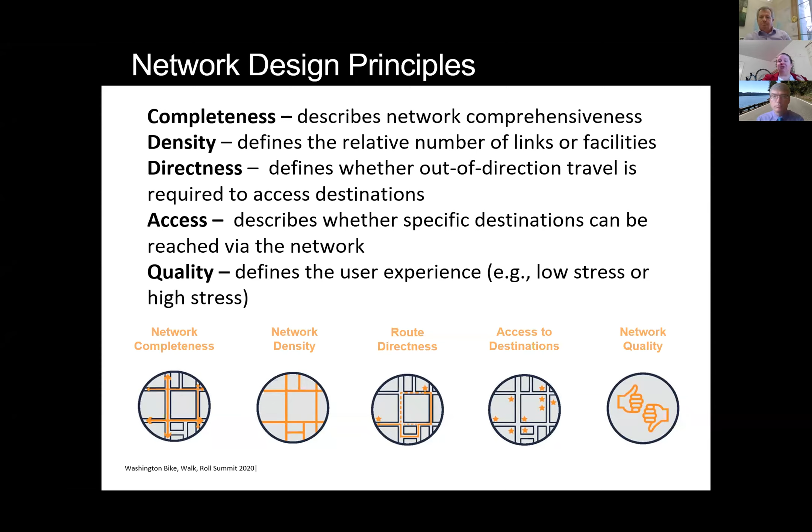So thinking about this, you can have one of these elements or even several of these elements in a network, but they aren't necessarily all represented. You can have a network that's dense but indirect, or a network that's high quality but doesn't get people to where they want to go. So this is important because counts don't tell the whole story.

Historically, the ATP has relied on counts and assessments of demand to drive bicycle facility selection and where facilities will be constructed. One example of where counts didn't tell the whole story was the 520 bridge. And Brian, I'll ask you to elaborate here if you want when you talk. There was the 520 bridge. There were not counts available because the facility didn't exist. It was constructed anyway, and today it's one of WSDOT's highest use facilities.

So what that indicates is that you can't always rely on counts to understand where the demand is. Therefore, if we start looking at networks and where facilities need to be built to get people where they want to go, that will give us a more nuanced understanding and a better chance of building a comprehensive, connected bicycle and pedestrian network. So identifying these network deficiencies is really an important part of demonstrating need, is the take-home message that we're conveying here.

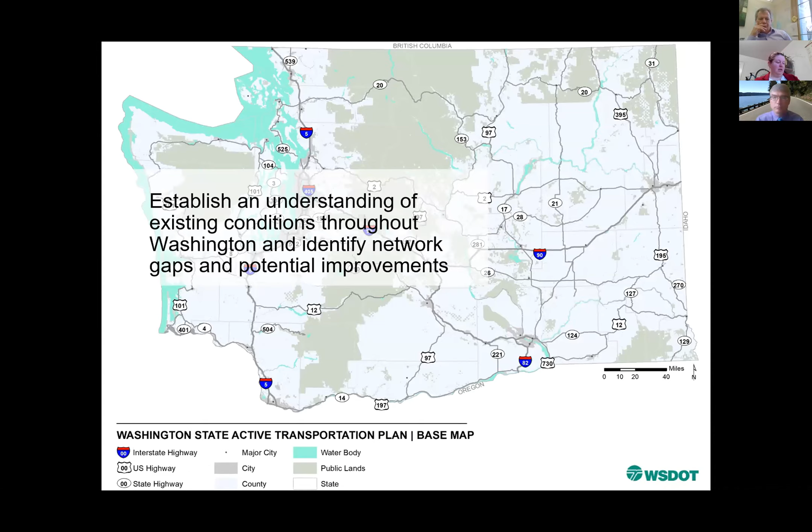And the Washington State ATP, one of the things that it strives to do is establish an understanding of existing conditions throughout Washington along the state highway network in identifying gaps and potential improvements. So WSDOT considers this in two ways. They want to consider travel along the state highway network and then the ability to cross the state highway network. We did that through a consideration of links, which is along, and the tool that was used to assess travel along roadways is level of traffic stress.

Level of traffic stress is a scale of network facility quality that is numbered 1 through 4, with LTS 1 being the lowest, LTS 4 being the highest, and that corresponds to lowest stress facilities and highest stress facilities. The methods are grounded in a guide that was released by the Mineta Transportation Institute in 2012. There are various flavors and adaptations of LTS that are used. The adaptation for WSDOT included context, number of roadway lanes, presence of bike lanes, presence of shoulders, and traffic volumes.

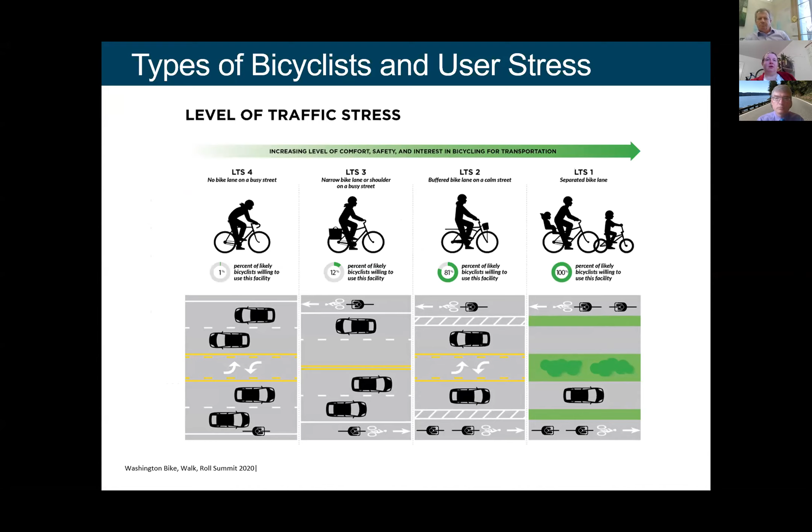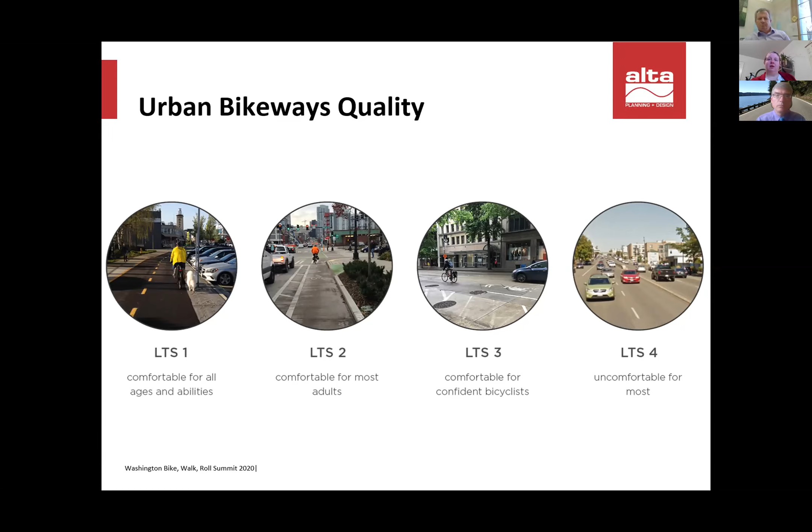This is a picture of what roadway sections might look like if you are considering LTS 1, LTS 2, LTS 3, and LTS 4 roadways. And these are tied to Roger Geller's four types of cyclists, if you are familiar with that scale. Here's a quick visual reference. This is what LTS 1 through 4 roadways might look like in an urban setting. And these photos are taken from Seattle. And here are photos of what those same LTS 1 through 4 facilities might look like in a more rural setting. And these are taken from various locations in Eastern Washington.

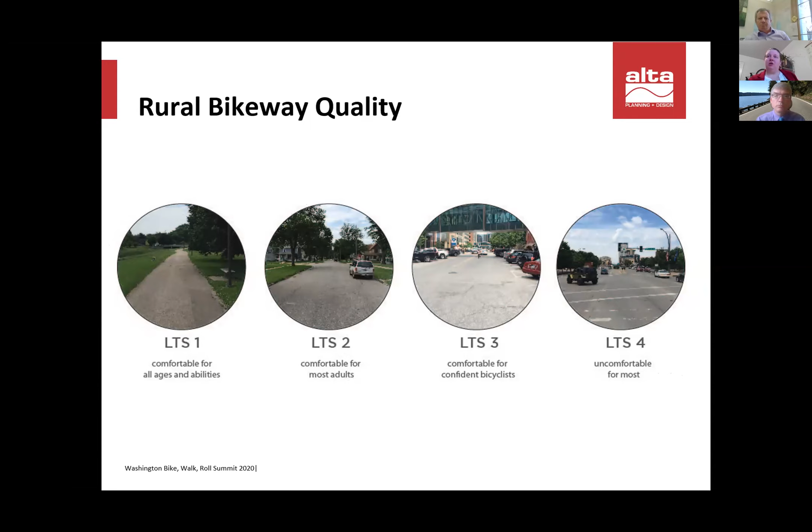You can imagine that doing a statewide analysis with level of traffic stress was data intensive, and we discovered data limitations as we were moving through the analysis. Specifically, we wished we had bike lane widths, more detailed information on trails, and more information on sidewalk presence. There are other attributes that would give us a more nuanced ability to understand the network. Those might be parking and right turn lanes, but those can also be done at a more detailed level when you're looking at a corridor.

So this is what we came up with, and this is just a draft map. This is not available yet. It's still in development by WSDOT. Barb mentioned the plan will be out for comment later this fall. We identified gaps as areas with a level of traffic stress score 3 and 4. This is, of course, a first pass at understanding the need on the state highway system. And as mentioned, Brian will talk about how this slide that you see here was refined.

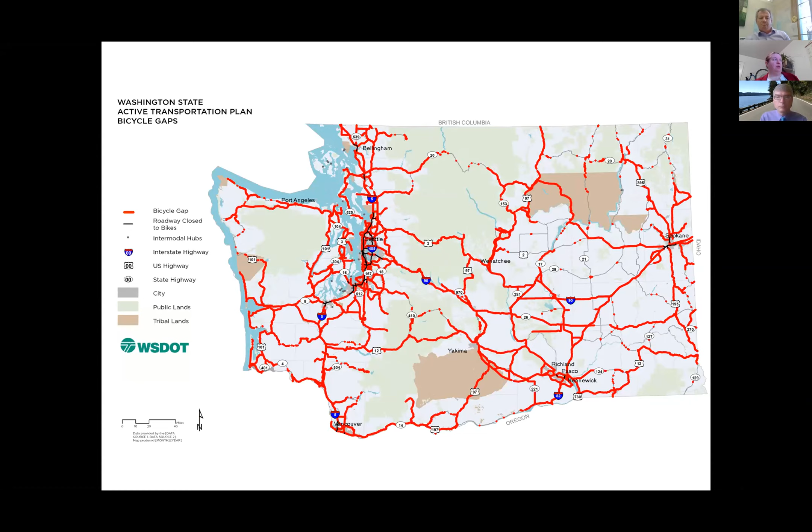We're going to touch on nodes really quickly, and that's across, how you get across the freeway. For this presentation, I'm referring to this concept as the highway barrier permeability test. It could also be referred to as the highway crossing stress test, or my favorite is the why does the chicken cross the road, or how hard is it for the cyclist to cross the road test. The purpose of this study, which contributed to the Active Transportation Plan, was to understand how hard or easy it is to cross roadways in the state highway system.

What we used, the tool that was selected, is a route directness index. The definition of a route directness index is it considers the variation in a straight line distance versus the network distance. So it measures out of direction travel. If you want to get from point A to point B and it's 1 mile in a straight line, and it is 4 miles via the roadway network, that means you have to go 4 times as long and 4 times out of direction to get to where you want to go, meaning it's very likely a trip that you are not going to make.

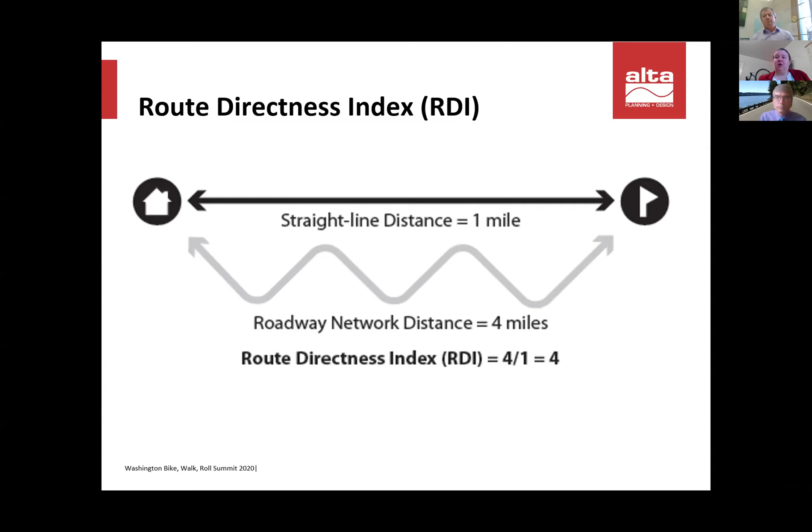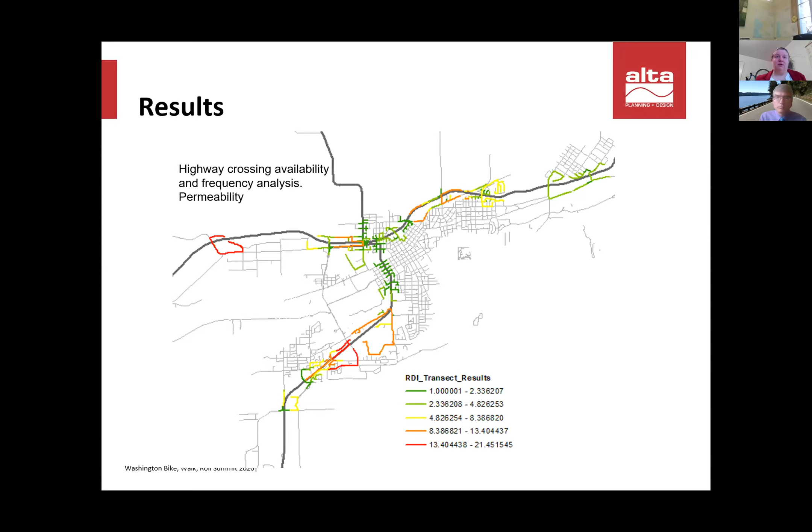Now, we did some preliminary visualization of this data, and we showed locations where there is a route directness index of greater or less than 2. For the sake of conversation and analysis in the Active Transportation Plan, we started to think about areas where route directness index is less than 2 as crossings that might viably be made. We know this isn't a perfect metric, but it is a place to start.

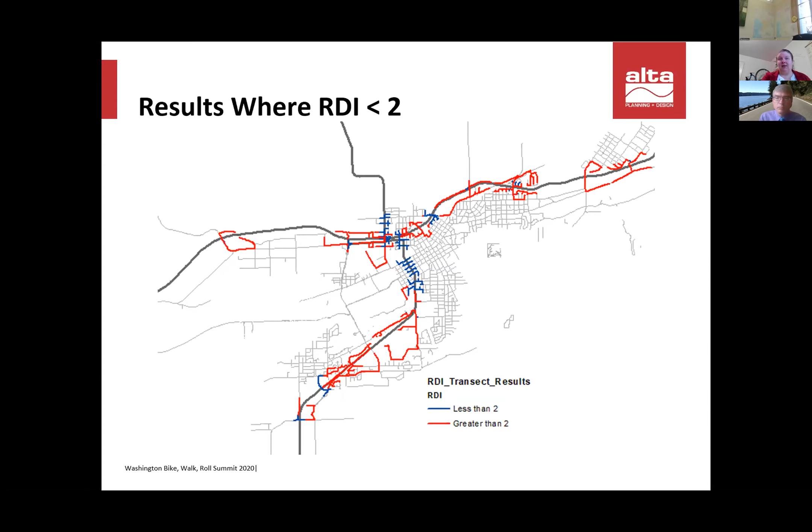And as a note, WSDOT has not adopted this study or an official policy behind the route directness index yet. Brian can speak to that, but it is definitely an exploratory study, which is working its way through the draft process. A couple of potential metrics have been explored as a part of the study: average route directness of a roadway or a corridor or a county, average distance between crossing opportunities that might viably be made, and that is where route directness index is less than 2, or an average RDI, which is mixed with level of traffic stress.

So that was a whirlwind tour through the high-level concepts that Brian will be elaborating on in the next presentation.

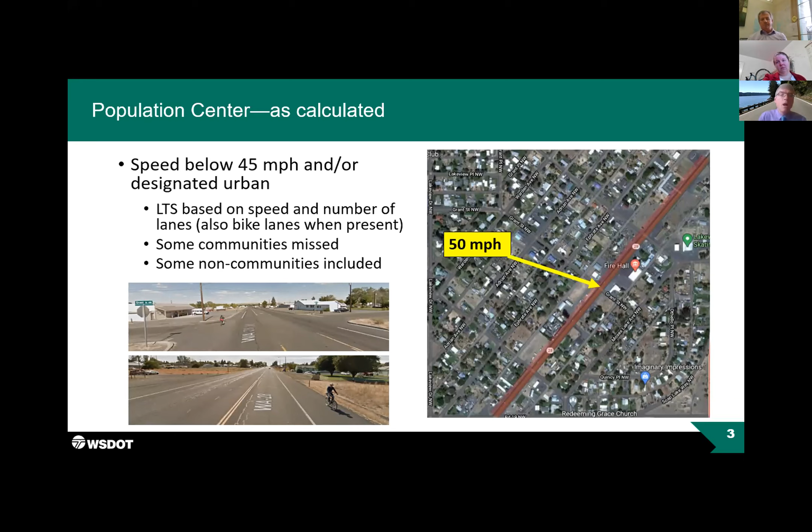Census-designated places do not have legally defined boundaries, but their margins are recognized nonetheless, and Washington's Office of Financial Management keeps data on these communities. The names of many census-designated places are as readily recognizable as some cities and towns, such as Quilcene, for example. Some, like Spanaway, are larger than small cities. Some have recently become cities, such as Spokane Valley, and others are in the process of doing so.

But incorporation is much more difficult today than it was in the past. So many communities will remain census-designated places under the leadership of their respective counties.

Here, we look at applying the population center idea to intersection need. With the transportation system historically focused on moving motorists, determining statewide system needs for walking and biking can become unmanageably large, and the message of need can become diluted. Using population center boundaries and gaps identified through level of traffic stress analysis enabled us to focus need determination.

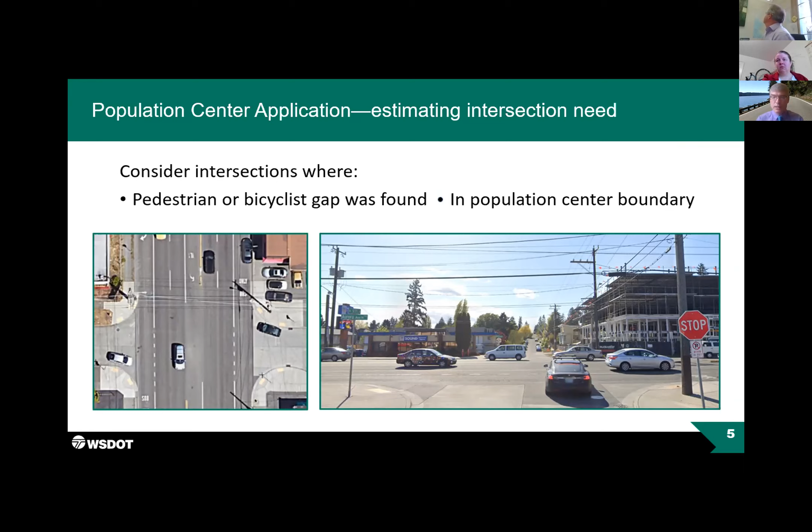Once again, limiting the estimation of statewide need to population centers helps us focus the message on places that people understand, where the distances between destinations are more walkable and bikeable. Even with such a focus, the statewide need is great, and of course, the price tag to address it is formidable.

Bridges are another category of need that benefit from using a population center focus. Instead of declaring that almost all bridges are deficient for walking and biking, we concentrated on those that are both in a population center and were on an identified traffic stress gap. Using our agency's bridge data and applying sidewalk and shoulder criteria, we used GIS to estimate statewide bridge improvement needs.

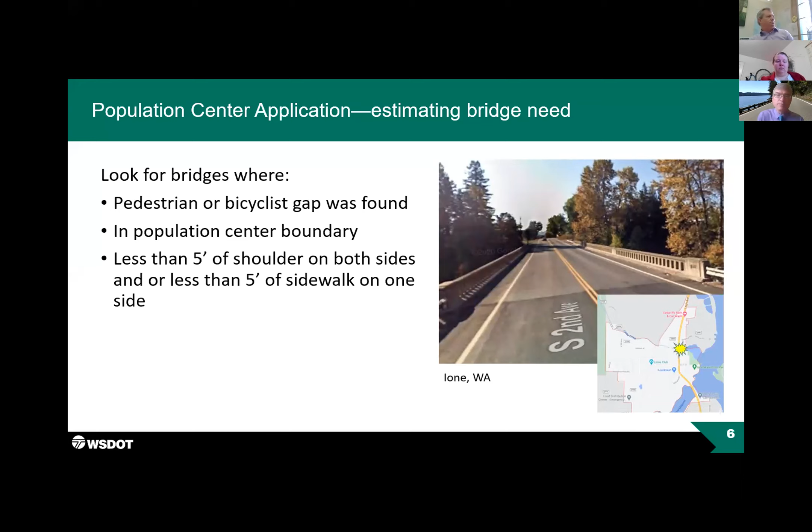Here is an illustration of what can be done when level of traffic stress is visualized in terms of population centers and other data sets. In this slide, the dots represent transit stops associated with these city and census-designated place population centers. The colored lines are population center gap segments, purple for urban and green for rural. Here, the gaps have not been cut by the population center boundaries. It is interesting to note that Burbank and other population centers do not appear to be served by fixed route transit, and people living there may also be having difficulty getting around on foot or by bike.

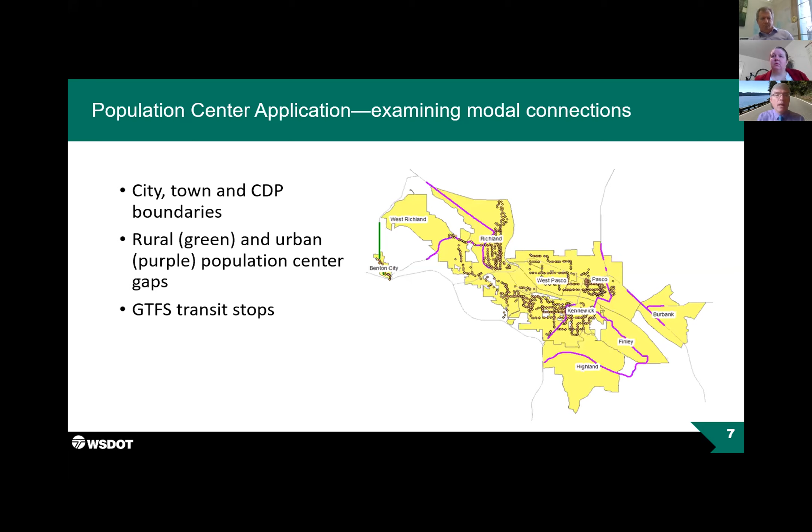As a last look at population centers, I wanted to point out that new data analysis techniques such as the level of traffic stress can highlight statewide needs for data. One weakness of our level of traffic stress analysis was a lack of sidewalk data. The pandemic stay-at-home order gave us a unique opportunity to use some of our agency's capacity to visually scan and record the presence of sidewalk within population center boundaries.

The work is ongoing, but 405 miles of sidewalk on state roadways in population centers were identified so far. That means that about 24% of the state roadways within the population center boundaries have some sidewalk. Much of that sidewalk may be in key areas of those population centers, instead of along farm fields, for example. So the 24% number is actually encouraging. Note, however, the quality and completeness of the sidewalk is not known.

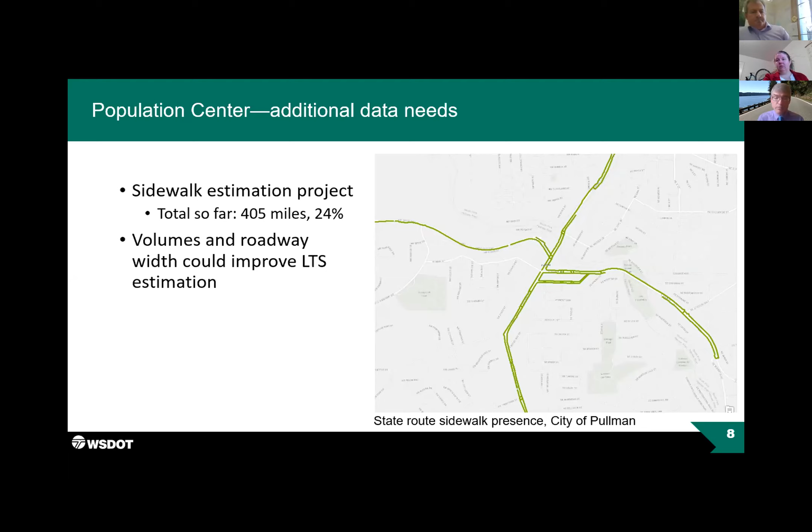In some cases, we had data, but it was not used in the analysis for various reasons. Traffic volumes and roadway width were not used in our population center analysis. Going forward, we hope to use the new sidewalk data and incorporate other data sources into future analysis efforts to get a better picture of level of traffic stress in those population centers.

As Kim discussed, we computed level of traffic stress for all state highways. We used somewhat different criteria where non-population center contexts were exhibited around the state, but we still identified gaps there. You might have noticed her map that just showed gaps all over the state. However, it was not always clear that the locations we called a gap need attention more than the locations that were not gaps. Consider that all of these locations have posted speeds of 45 miles per hour or greater.

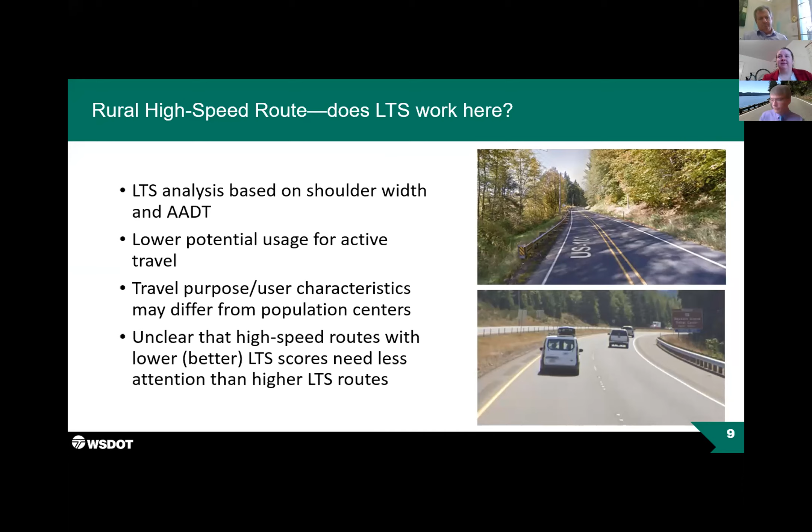At this point, we determined that we're not ready to estimate need for the rural high-speed context. We definitely recognize it, but each situation is nuanced. Planning should consider the interaction between travel purpose, potential demand, and available facilities, which include local system roadways. Investment must consider other factors too, such as equity.

Thousands of miles of high-speed routes can gobble up active transportation dollars very quickly. So a strategy must be developed. That strategy will need to look at state and local facilities as a single system.

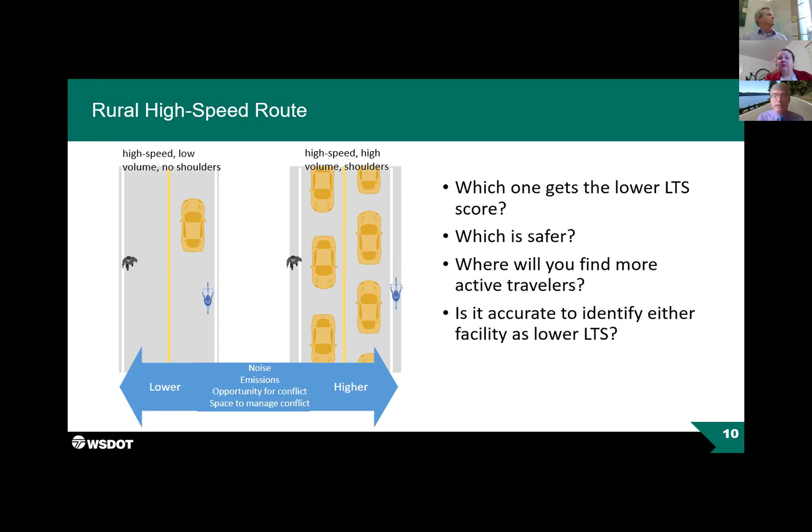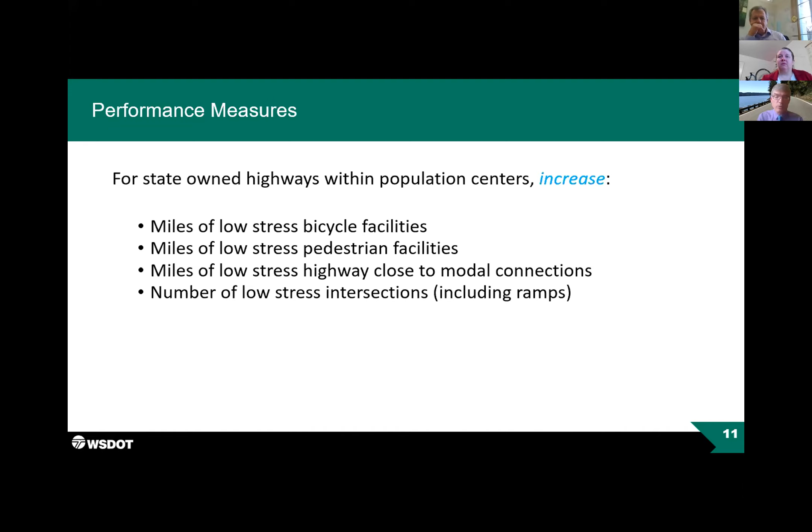In terms of a baseline, we currently have a little over 130 miles of bike lane out of about 1,700 highway miles in population centers. We identified approximately 50 miles of low-stress highway near our modal connections, such as transit centers or ferries. And we have about 6,000 intersection gaps in population centers, plus another 1,000 highway ramp intersections to look at. Two other recommended performance measures will be discussed in the next slide that deal with highway crossing availability.

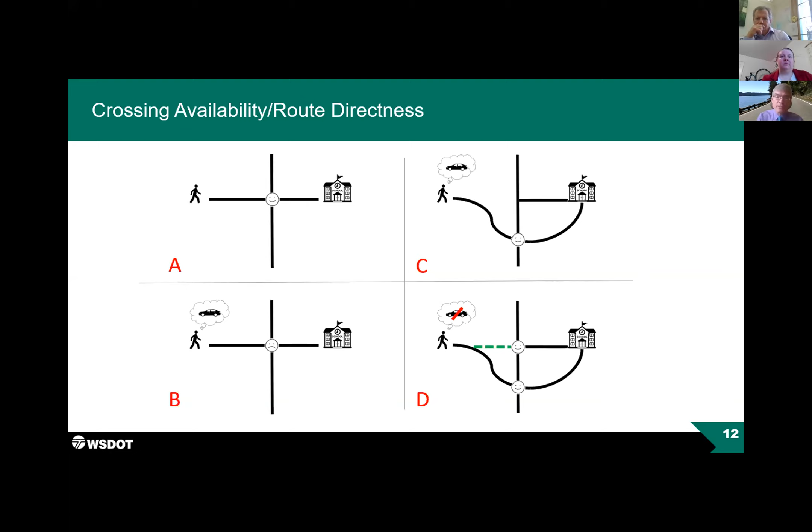Two performance metric recommendations came out of the crossing availability study. The first is simply to identify how far apart low stress crossings are. The second is whether or not people can make relatively direct and low stress trips between destinations within their communities. The metrics seem straightforward, but there's still some work to do on establishing a baseline and likely some very heavy lifting to do regarding establishing a goal.

As you can imagine, there are significant implications to stating that low stress crossings will be spaced X feet apart. We know we can't build pedestrian bridges everywhere, and that such bridges are not even effective solutions in all cases. But we need to have the hard discussions if we are to advance active transportation meaningfully.

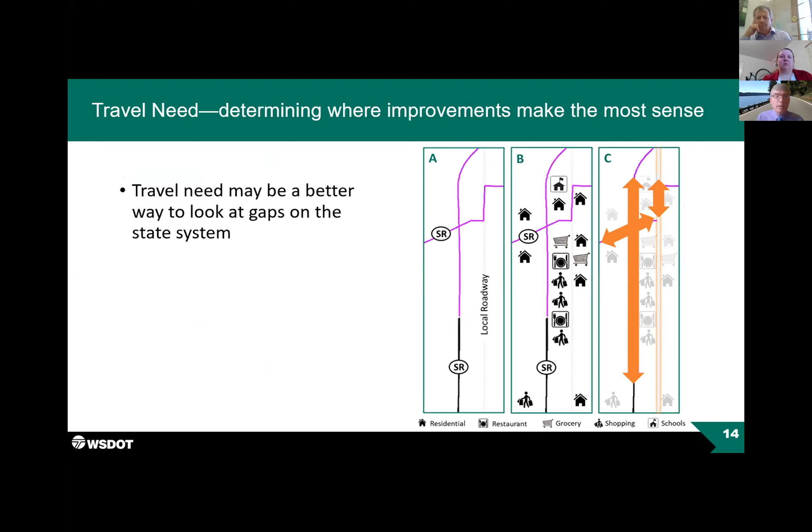Earlier, with respect to high-speed facilities, we discussed the idea that state highways and local routes must both be considered when recommending improvements for active transportation. The same is true for population centers. In this hypothetical scenario, we see a couple of state routes and a local roadway. The state routes have been evaluated for level of traffic stress. The pink color signifies that we have identified a gap on the state route, and the black is a no bikes or pedestrian zone, so also a gap.

In panel B, we see the many reasons people want and need to be here: housing, food, shopping, and school. Panel C shows generalized arrows that represent travel needs in this area. Essentially, people have a travel need to go north-south or east-west. What panel C suggests is that the north-south travel need could be fulfilled by either the state route or the local roadway. Which should it be?

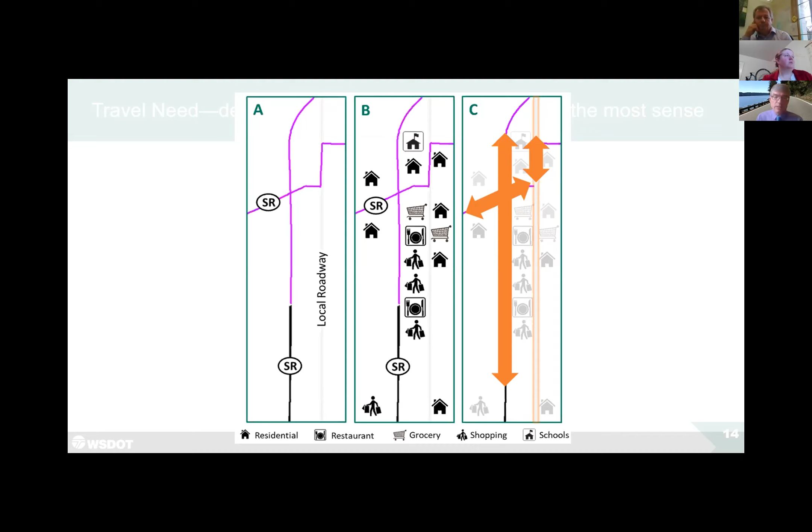In terms of access to destinations, the local route looks to be the better option, yet often it is anything but low traffic stress. Addressing active transportation means investing in the whole system, not just the parts a given jurisdiction is responsible for. Partnerships and flexible funding are the key to making quality walking and biking available to everyone.

So what's next? We've already begun a project aimed at refining our new active transportation data and determining how it can be integrated into the decision-making process at WSDOT. And of course, we are hard at work with the Active Transportation Plan and eager to get it out for public comment as soon as possible. Level of traffic stress is on the data end of a potentially much larger set of next steps that our agency is working towards as we speak.

We are endeavoring to establish a true multimodal policy, in contrast to our more car-centric policies, that will guide all our efforts and investments. Related to that idea, we are exploring multimodal level of service as a way of measuring our success with serving walkers, bike riders, transit users, freight operators, and drivers. With speed management, we are looking at setting speeds to match a context and supporting those speeds through roadway design, rather than focusing on speeds most people prefer to drive.

There are many other good ideas moving forward at WSDOT, and too little time to bring them all forward here. But in keeping with the theme of this Walk, Bike, and Roll Summit, I want to end by highlighting the agency's efforts to advance equity and how we prioritize investments. In addition to serving all modes, our agency understands the need to serve all people, and with a clear understanding that equity is not equality.

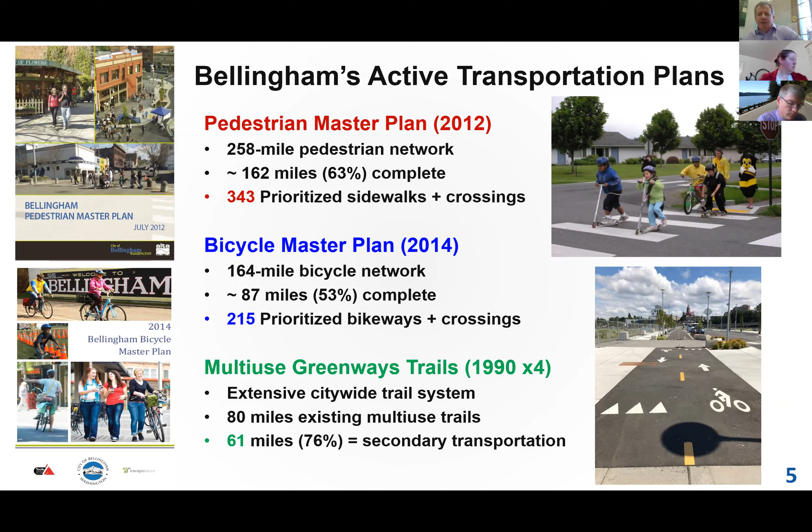Our pedestrian and bicycle master plans are supported by a dedicated funding source called the Transportation Fund, which is actually on the November 3rd ballot in the general election. And we're very hopeful that that gets renewed. That is what provides the funding for us to make all of the progress that we've made.

So from a network standpoint, now diving into the bicycle master plan, in looking at trying to create a citywide bicycle network, the first thing we wanted to do was assess the demand. Where do people want to go? We used a number of different techniques and a number of different opportunities for public input, surveys, online interactive maps where people could literally show us where they were riding or where they wanted to ride. We took it out to neighborhood meetings, public open houses.

We had a dedicated steering committee for both the pedestrian and bicycle master plans. And these were representatives from various interest groups around the city, as well as internal city departments like police, fire, emergency medical responders. We based a lot of what we were doing on our multimodal policy approach and our comprehensive plan.

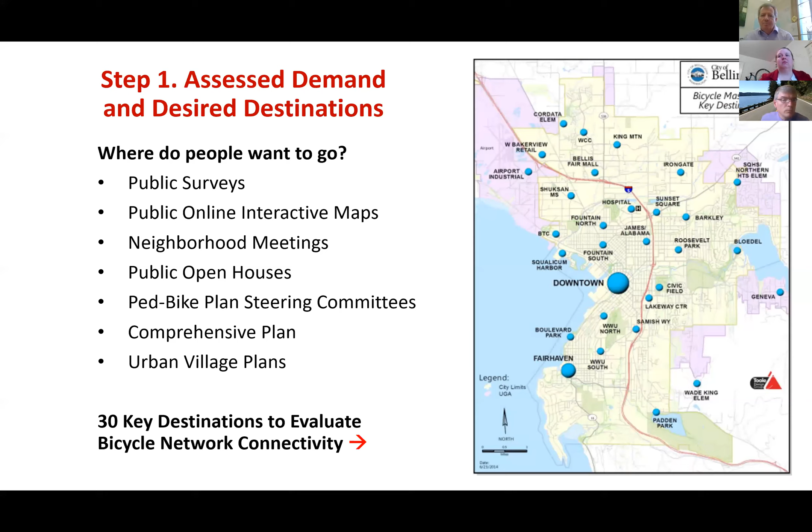And the fact that from the land use side, we here in Bellingham have created urban village plans. And these are mixed use centers, much like the stuff that's been done in Seattle and Portland, places where you've got more complete bicycle pedestrian networks and high frequency transit. And so if you look at the map, you can see that we had about 30 key destinations throughout the city in every neighborhood. And we used that as kind of the magnets to draw people in terms of where people are wanting to go.

And from that, we developed a draft bicycle network that we then took out at public meetings and showed to everybody and asked them to respond to. And in the end, this became our recommended bicycle network. And it's got a wide variety of bicycle facility types shown here in various colors. I will just point out a few things.

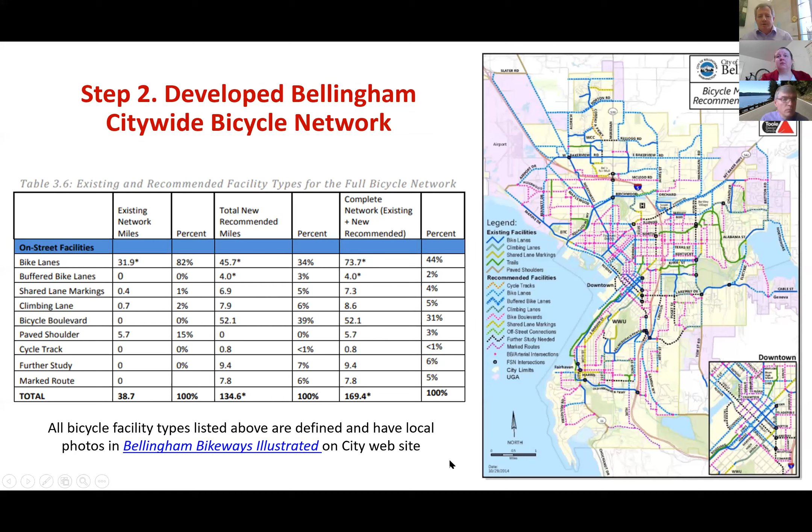For instance, since we're talking about level of traffic stress, and we'll get to that in a moment, 31% of our planned bicycle network is on bicycle boulevards, shown in pink on the map. So that's a pretty big chunk of our network as low stress. They're residential streets, low volume, low speed, very comfortable for bike riding, and they connect, of course, to bike lanes on arterial streets. And then we've got a variety of different type of dedicated bicycle facilities on our arterial network. And almost all of our arterial streets are represented in the bicycle network. So we've got pretty amazing coverage in terms of overall citywide network.

The next step was to get into the level of traffic stress. And we were doing this in 2013 and 14. So there was not as much guidance as there is today, but we based it on methodology from the Mineta Transportation Institute. And we put quite a lot into it. We customized it for our own purposes, but we looked at a number of different things, including volumes and speeds, slopes. We've got a variety of terrain here in Bellingham, a lot of places where people are expected to ride uphill. When we looked at prioritizing our network, we emphasized social equity and employment centers, as well as transit routes and transit dependency. But overall, as I said, we were really focused on connectivity, making sure that when we created a network, it was getting people to the places that they said that they wanted to go.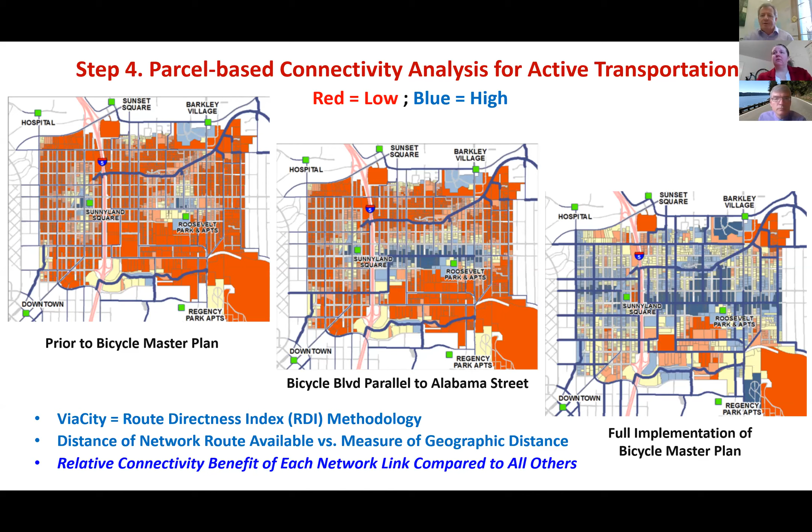And then on the right, you can see the fully implemented bicycle network and how that changes the mobility connectivity for people living in these areas to get across mobility barriers like Interstate 5 and other major streets like Alabama Street in Bellingham. And so this was an incredibly helpful thing for us to try to look at the user benefit from these network connections.

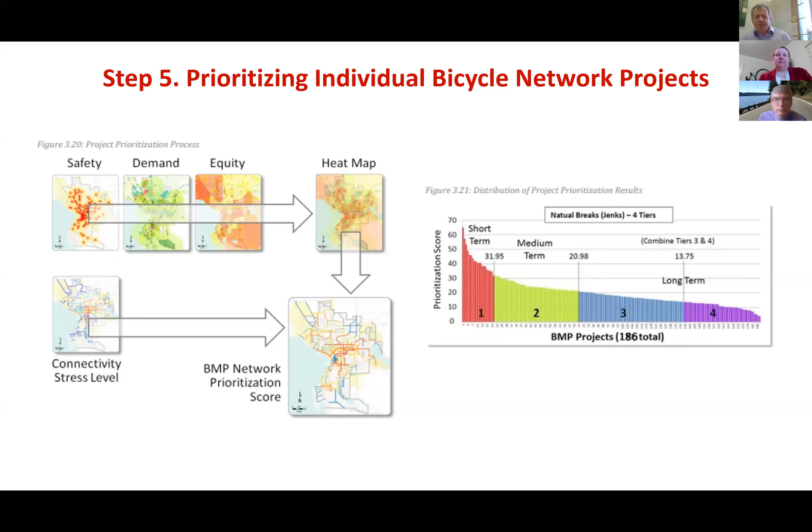So the next step was actually prioritizing our individual bicycle network projects. We had a list of 186 projects, and we had to figure out, okay, how are we going to decide which one of these we should look at first? What's the priority? And these are all the variables that went into that. We've already talked about a number of them, but then in the end, we came up with a network prioritization score, and that then kind of ranked our project list. And what we ended up with is a total of 106 network link projects. There's about 28 crossing improvements as well, but 21 of those network links were listed as further study needed.

And I've highlighted a few of them, Lakeway Drive in particular, because I want to relate this to what you heard from both Kim and Brian in terms of the state highway system. In Bellingham, we've definitely labeled some of the state highways and bigger roads in Bellingham as mobility barriers. And we'll get to that in just a moment. But I wanted to focus on Lakeway Drive in particular. Using the ViaCity connectivity analysis on the right, you can see the change from having no bicycle facilities on Lakeway Drive to actually implementing what's recommended in the bicycle plan, getting bicycle facilities on this corridor, whether they're on street or adjacent to the street in a shared use kind of facility or protected facility.

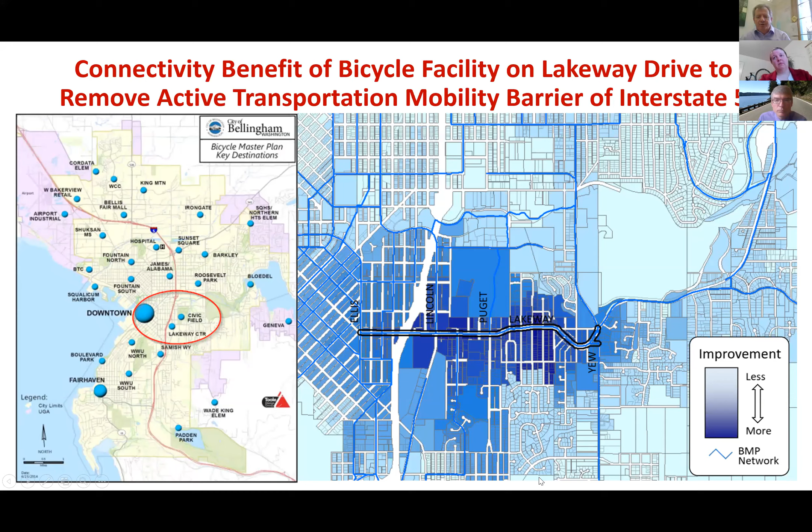And again, looking at our demand key destination map, clearly I-5 is a mobility barrier for people to get from the east side of the freeway into our downtown area. So it's a major destination and a major link. In fact, it was ranked number 2 out of the entire list of 186 projects.

So we've studied how to do this one time with our Lakeway Drive bicycle study in 2016 and 17. We were not able to reach an agreed upon solution getting under I-5. We had some ideas, and you can see some of those below here on the screen. These are conceptual, but we really think that we're moving close to getting a solution.

On the left, you can see that these are standard 5-foot marked bike lanes. This is a very busy street with about 26,000 vehicles a day going underneath I-5 here on Lakeway Drive. And it's probably not going to be the type of facility that's going to make people feel safe or comfortable or attract a lot of riders.

However, if we look on the right, there may be an easy way to create a protected bicycle facility, a shared use facility, making use of the existing sidewalk and then converting that into what we'll just call a multi-use pathway, at least underneath the freeway, to remove the barrier and allow people a way to get under the freeway and into the downtown in a safe and comfortable manner.

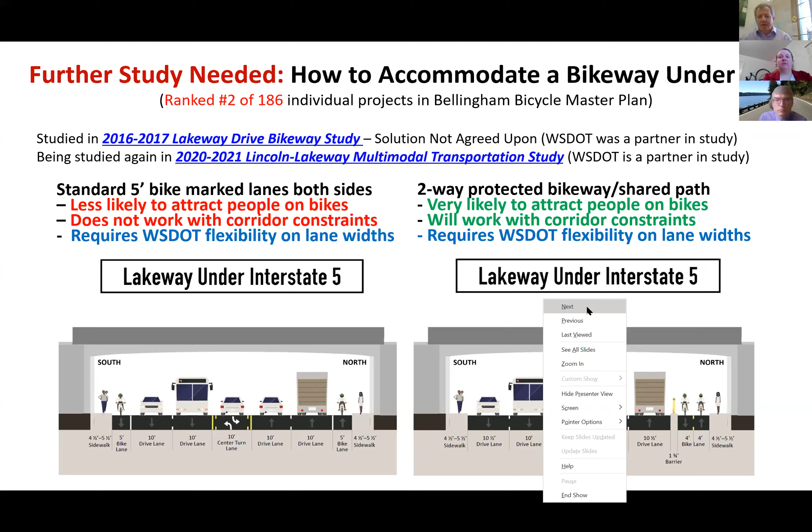We're not there yet. This is just one piece on a lengthy corridor that's an incredibly expensive project to undertake. But this is the one kind of linchpin, the bottleneck, if you will, of what we're trying to solve. So while we've done one study, we did not solve the problem. We're doing another study, the Lincoln Lakeway Multimodal Transportation Study.

And by the way, these highlights in blue are all links to studies on our city web pages. You can see here, we've got I-5, and on the graphic on the right, you can clearly see that both Lakeway and I-5 are labeled as mobility barriers. And that's what we're trying to break down, is that barrier. Get people across the freeway. So that's the purpose of this study.

In white outlined here, and I don't know if you can see my cursor, but in white outlined here is our Samish Maple Ellis improvements. I'm very happy to say that, first of all, we spent several years looking at this 1.5 mile corridor. We've planned and designed bicycle facilities. We were fortunate enough to have DOT fund these with a pedestrian bicycle safety grant.

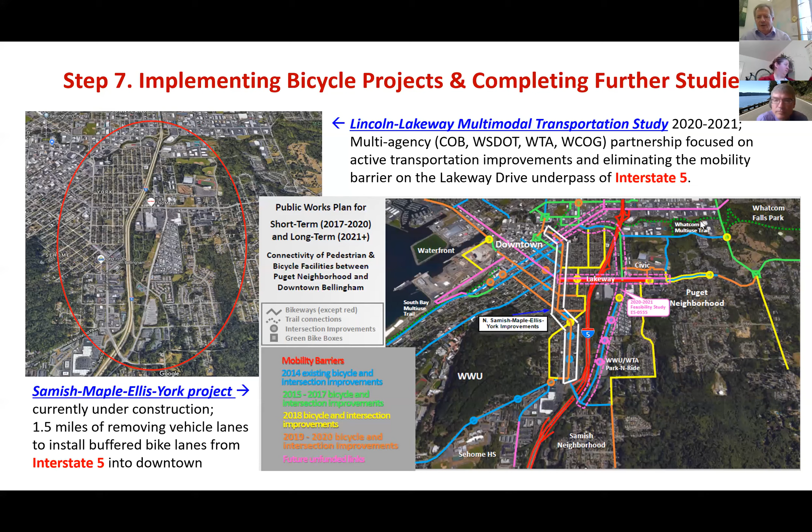And we have removed vehicle lanes, and this morning they're putting down the markings for the new robust buffered bike lanes on this corridor. It's one of our urban villages. Like I said, it's a 1.5 mile corridor, goes into our downtown area. And on the graphic, you can see the network connectivity that we've created over the past 6 years. It's extensive, and this is another really key piece in that network. We've done a lot up here in Bellingham. We hope to do more, but we have to have the funding to do that, and that's an important thing.

Another thing that's important in doing this work is to make sure that you let the public and your decision makers know what's going on and what kind of progress you're making. So each year we publish a report and we show everybody exactly how much progress we've made, how much the network has grown, how many projects we've been able to build, in our transportation report on annual mobility, and that's on our city web pages as well.

I do want to show you exactly what we've been able to do. We're fortunate enough to have, we passed a transportation benefit district measure in 2010. So we've had dedicated funding for non-motorized transportation projects. That expires at the end of this year though. So hopefully it will be renewed by the voters on November 3rd, but we shall see.

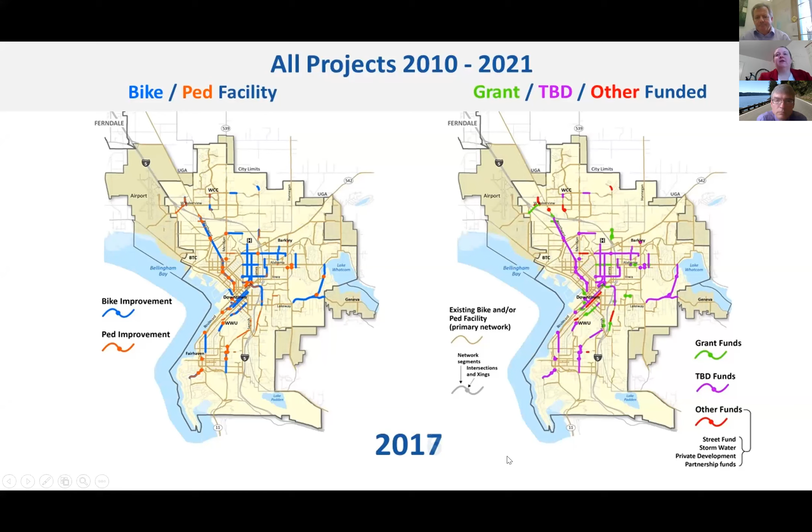We have been very fortunate to see the network grow over the last 10 years, and that's what I'm walking you through here. The purple that you'll see on this map is that dedicated funding that I mentioned a moment ago, the transportation fund that we hope gets renewed. And you can see how extensive the networks have gotten from both the pedestrian and the bicycle side of things, and how important this money has been for us over the years. And we really hope that we can continue this progress, but without that funding, that is very unlikely.

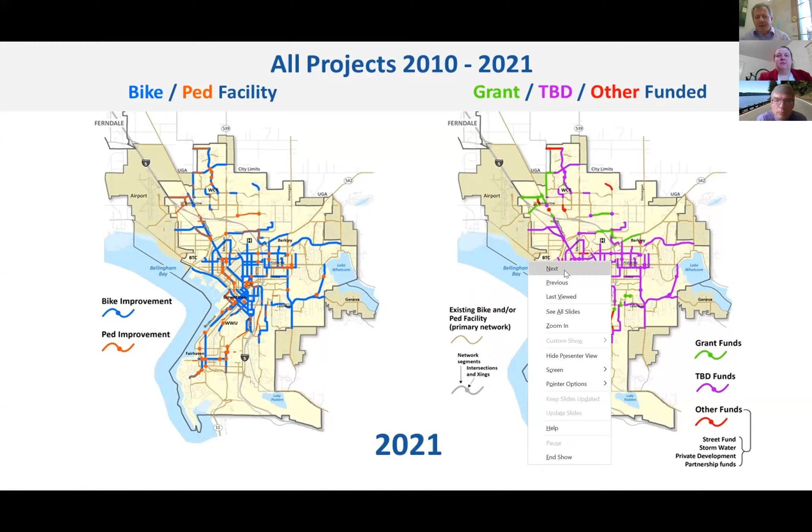I'm also very happy to report that from a social equity standpoint, because we very purposely and strategically built this as one of our most important variables into our project prioritization, on the pedestrian side of things, 69% of our projects have been in low-income neighborhoods. On the bicycle side of things, over 75% of our projects have been in low-income neighborhoods in Bellingham.

And again, that was purposeful, it was strategic. It's because we prioritized that as one of the variables when we went to go rank the project list. So when we pick our projects, it's kind of already baked into the rankings that we're going to be able to provide more bang for the buck in these areas.